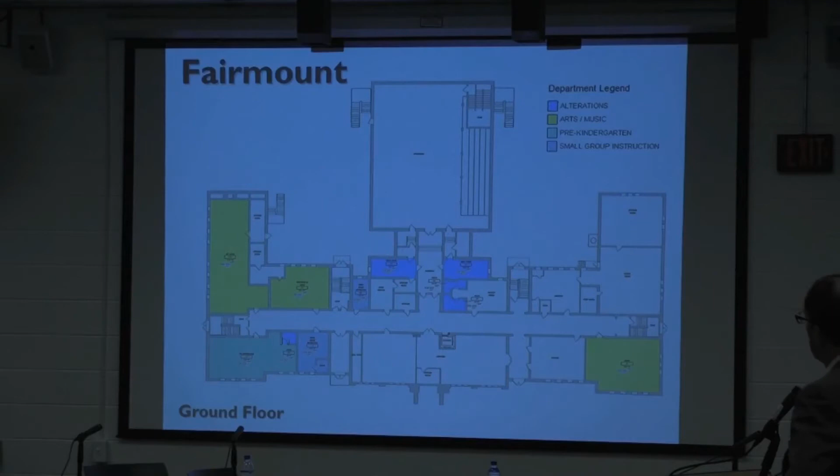So in the essence of time, I won't spend a lot of time on the plans because they don't add a lot to the description I just gave you, but just to hit the highlights, you see the blue areas, those are primarily the bathrooms that are being renovated. The other colors you see on the plan are just how the spaces would be allocated through the schools. Again, blue areas being the alterations, primarily bathrooms in this case. The elevator is right there.

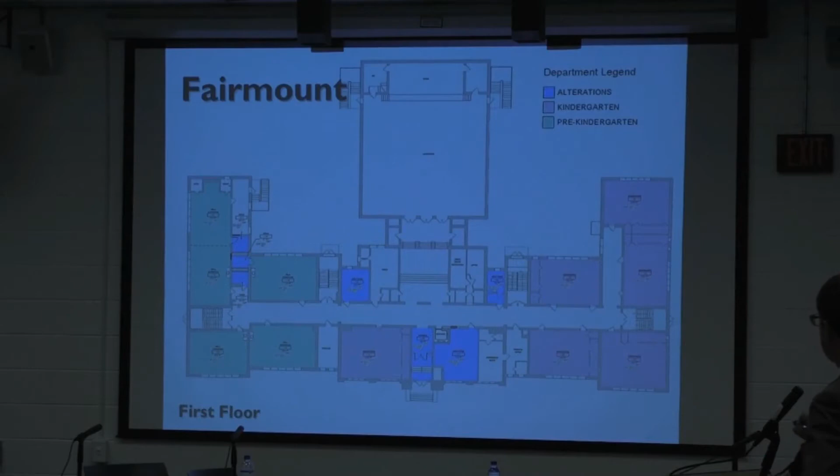So at Hillers, similar alterations in some regards. The reconfiguration of the school, bathroom alterations, as we mentioned at the other school. In this case, the nurses' area would also be reconfigured. The nurses' area is in need of some work to be in compliance with code and operational needs. Art room upgrades and classroom alterations, as well as ADA improvements to the cafeteria.

In terms of the renovations, again, student drop-off on the outside of the building, the bricks and lintel repairs that would happen around the school, window replacement, sound attenuation improvements, some improvements in the school to enhance acoustics and make the learning environment better and easier for people to understand each other. Roof replacement, interior doors would be replaced for age and operation as well as safety and security and lockdown. Electrical service and the generator here, a generator and transfer switch would be focused on the key emergency systems at the school.

Again, the boiler plant, similar to the other school, would be replaced. Building controls would be upgraded, and then HVAC in the classrooms, auditorium, gym, library, cafeteria, and faculty room.

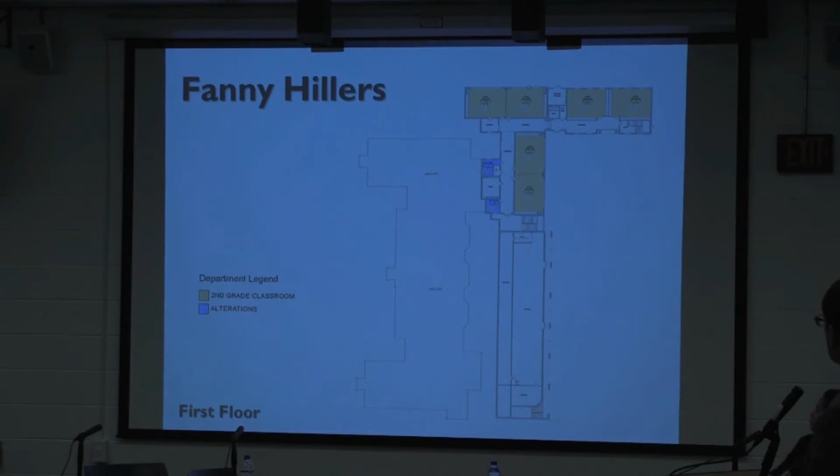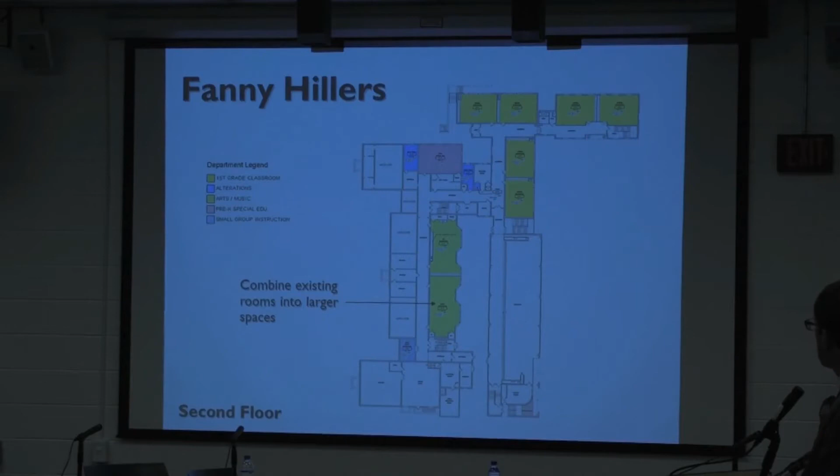I'm going to skip through the plans. The ADA access would be in this area for the cafeteria. The blue area is primarily bathrooms. There are some rooms at Hillers that are currently subdivided. This room, for example, has a wall down the middle, which would be opened up so it can better

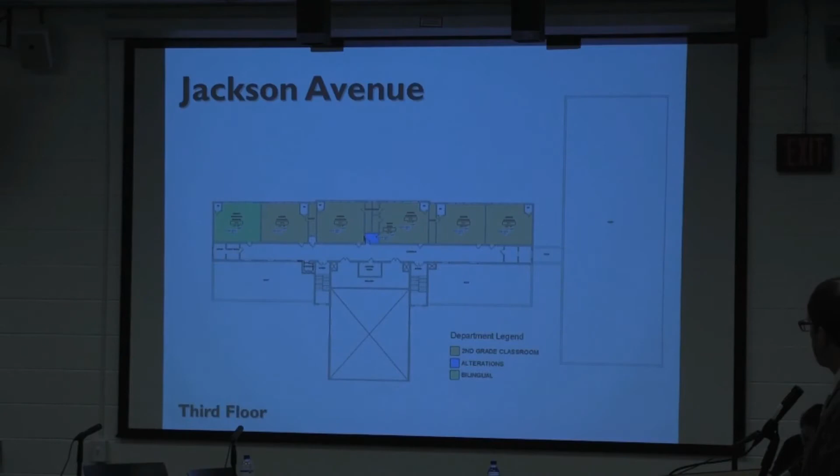At Parker, again, you'll see a theme here, some bathrooms, including early childhood bathrooms, upgrades to the offices, secure vestibule, and then Parker, because of the particular nature of that school, improvements to the third and fourth floor to improve security and control in what is currently an open plan building.

Drop-off area, the exterior would be repaired, in this case brick and stucco, again door hardware for safety and lockdown as well as operations. The gymnasium floor would be replaced, a new hot water equipment, a new fire alarm system, generator, and lighting in certain areas, specifically gym and classrooms.

HVAC upgrades here include a variety of equipment, exhaust fans, AHU. These are very obscure abbreviations if you don't know them, but AHU is just an easy way to say air handling units that provide the ventilation, heat, and cooling in the school. Those would happen, that's equipment that serves the building in a number of areas as well as the gym specifically.

Unit heaters, these are the units that are in each individual classroom that provide heat and ventilation. They would be upgraded along with the building controls.

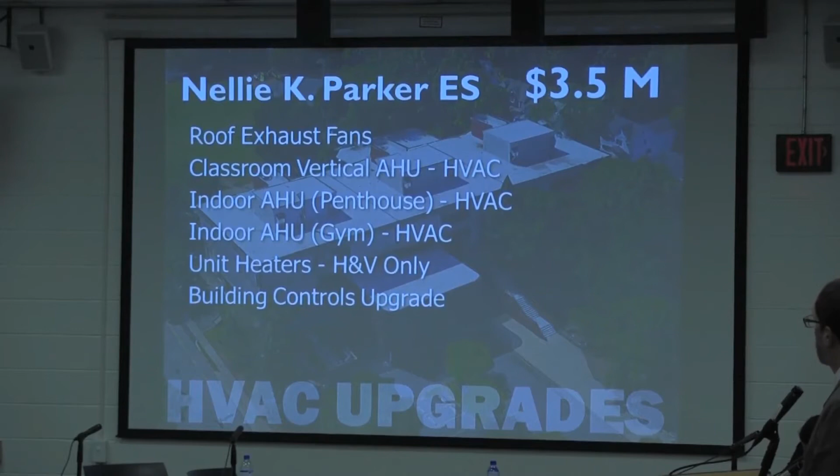Now at the middle school and upper elementary school, which would be changing to grades 3, 4, 5, and 6, bathroom renovations to the STEAM and other lab spaces, and some classroom alterations.

Renovations include, again, the exterior, including windows, door hardware replacements, gym floor replacements, and then safety and security, fire alarm, generators, electrical service upgrades, replacement of part of the roof, and a new playground to be consistent with the grades that would then be in place at the school.

The HVAC improvements include a variety of equipment, again exhaust and various mechanical fans and equipment that would be upgraded, air handling units for ventilation, heating, and cooling, indoor air handling units as well as some of those located on the roof, administration improvements, unit heaters for heating and ventilation, and building control upgrades.

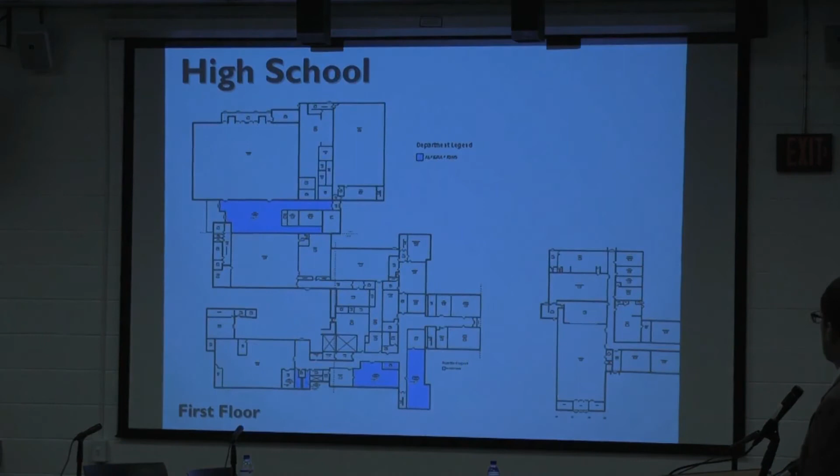So again, the areas we've described, I'll kind of skip over this. We can certainly come back and talk in more detail if you wish.

So the new component to the picture is the new 7-8-9 school. This school would be built next to the high school, on the adjoining property. It would include a gym and an auditorium, and the auditorium would be anticipated to be used not just for those grades in that school, but being located next to the high school, it could serve a cooperative relationship with the arts programs at the various schools. Obviously a media space, common areas, and there would be a parking garage built.

The site itself can support the school, but the site is relatively tight when you consider the size of the school, for about 1,470 kids, and the parking needs around this area in general. But being located next to the high school, that parking garage can serve both schools, and the buildings can share resources.

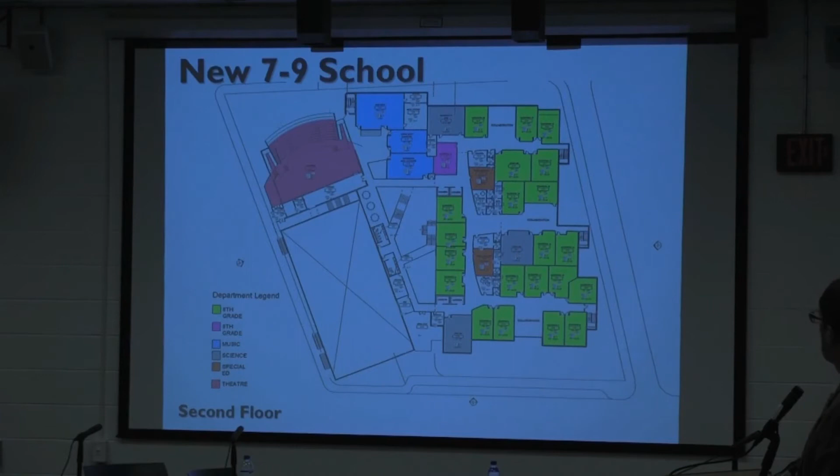Each floor has about 25 instructional spaces, plus art and music. In this case, the auditorium is at this end — again, the entrance, administration building, and high school are down here. This core that runs through the common space in the middle is kind of that public core, setting up for after-hours activities. So the art rooms up here are shown in yellow, music rooms up here are shown in blue, and the classrooms for the various grades are shown to the right.

And then when you go to the upper level, you have the art rooms in yellow, and the other classrooms to the right in various colors. So the design is still forming, and there's a lot of detail to be fleshed out yet, but these are the plans as they stand right now.

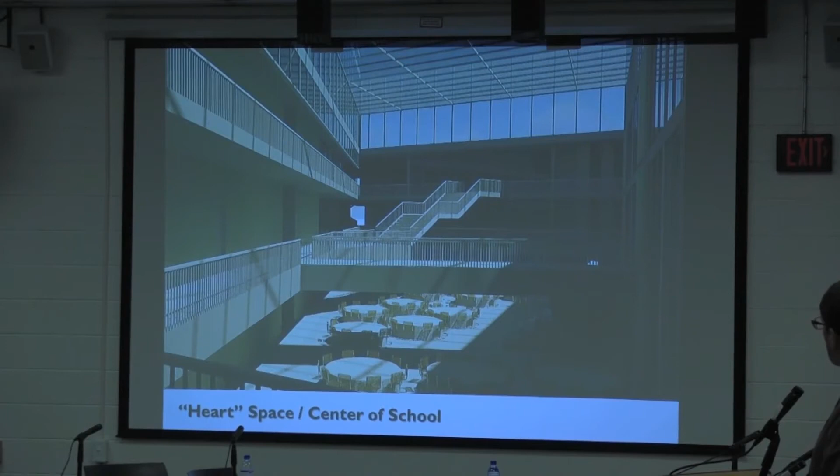I've also included a couple of images — this is very preliminary, just conceptual, but to give you some idea of what that center space might look like. This is a preliminary model that shows the breakout usage, cafeteria, and miscellaneous usage on the lower level, and circulation areas around it on the various floors. So this is one vision of what that might look like, and we're just beginning to model it — it's beginning to take shape, so there's a lot of development yet to come.

But the space would be skylit, and we want to bring natural light down into all of these spaces. The commons areas and classrooms would all have access to natural light, either directly from the outside or borrowed through skylights and adjacent windows.

So everything involves dollars, right? Alterations, if you add up the various numbers, total about $16.5 million for the various alterations at each of the schools. Renovations are about $17.5 million. Now these dollars represent what I'll describe as project costs, material and labor costs. They also include allowances for soft costs, about half of which is contingency, fees, permitting costs.

Bidding costs, legal costs, all the things that districts normally incur as part of projects. Now these are budgets. Obviously the real costs will be determined by a bidding process that happens after the full design and documentation advances after the referendum. So we purposely budget to be careful. When a district goes to referendum, you're asking the public for permission to spend a maximum amount, no more, not a dollar more. So obviously the goal is to spend ultimately less. We're including contingency because as we dig in the ground and open walls, we often find things that are a little unexpected. That hopefully is minimized by the detailed engineering work after the referendum, but that's why contingency is part of the budget.